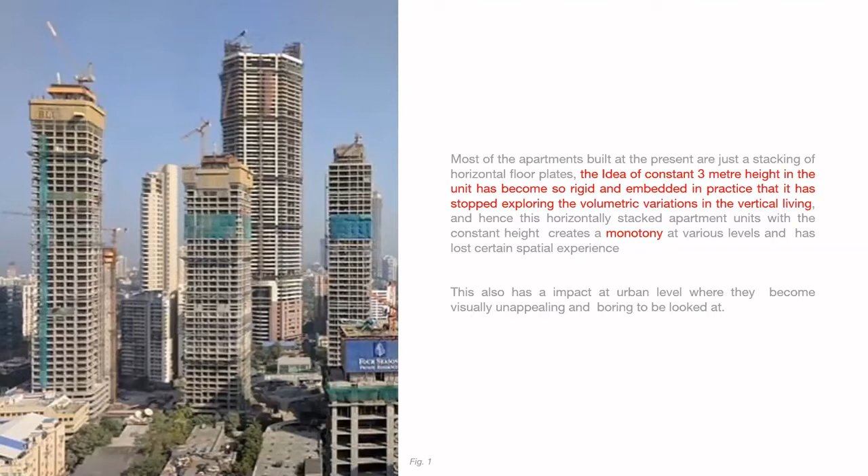As we can see in this picture, most of the apartments built in India at present have a constant 3 meter height, which has become so rigid and embedded in practice that it has stopped exploring volumetric variation in vertical living, which results in monotony at various levels.

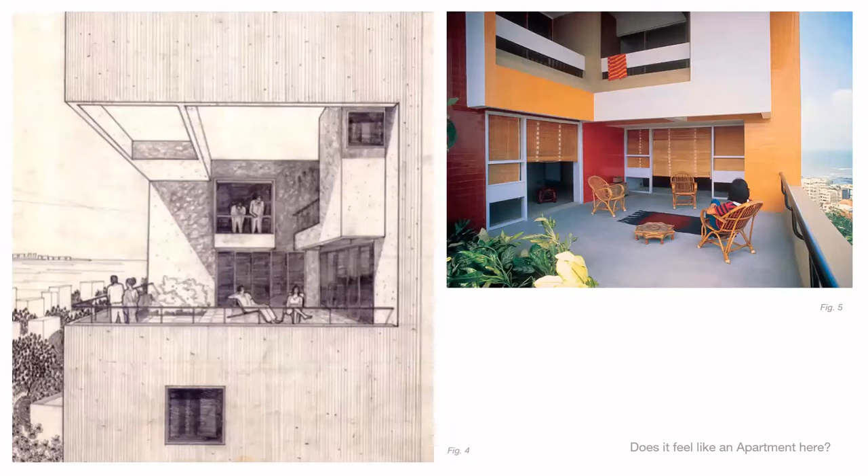Does it feel like an apartment here? Or doesn't this space look like a veranda of a bungalow on the ground? The common thing about all these spaces is that they all belong to an apartment, and yet it still manages to have certain spatial experience that a bungalow gives because of its larger volume.

Now, given that volumetric exploration in apartment units can enhance the spatial experience, the larger question here is how to break away from the trap of 3 meters. Can this situation be changed? Is it possible to spread a unit vertically? Hence this presentation tries to understand the spatial benefits and practical challenges in making such buildings.

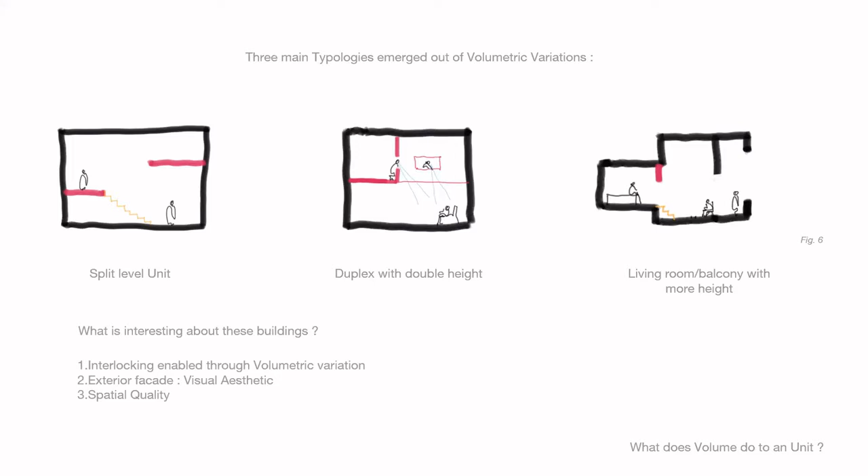These are the major three typologies that emerge out of volumetric variation. We will briefly see what is interesting about this typology through these three examples, three buildings built in different contexts.

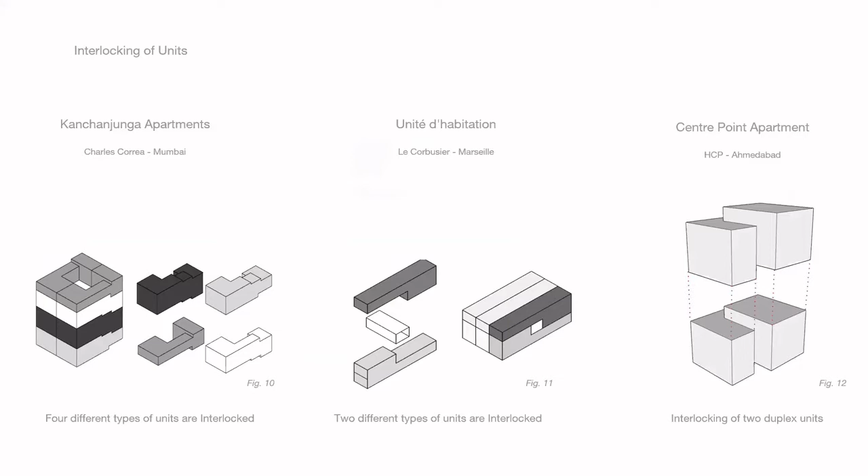The first interesting thing about it is the way the change in volume within the unit allows a variety of units to get interlocked. Or if we see at a block level, how these buildings have achieved certain height efficiency due to interlocking, where each unit tries to remove the impression of standardization.

The second thing is the way such units allow a wide range of openings on the facade that breaks up the building mass and provide greater visual interest.

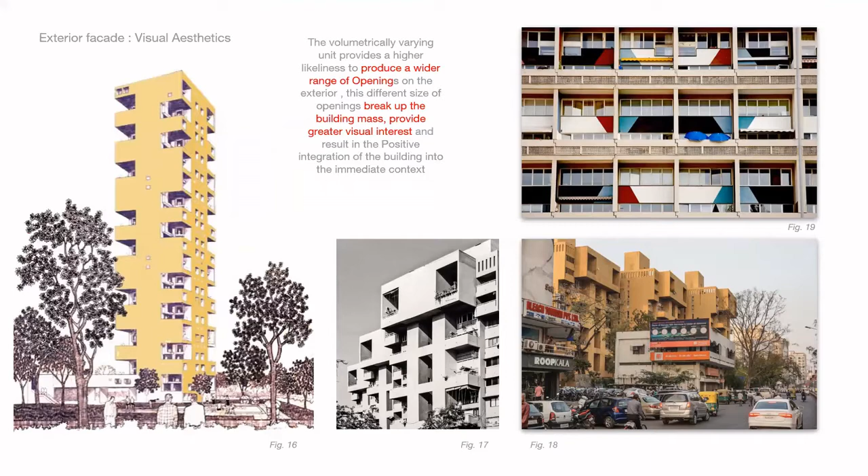The third is the spatial benefit. One of them is privacy, which is the major problem in apartments nowadays. With this typology, where the entire unit is divided on two levels, this problem is solved. I came to know from the developer that they also are trying to resolve the issue of privacy, but it is too difficult when the unit is on the same level.

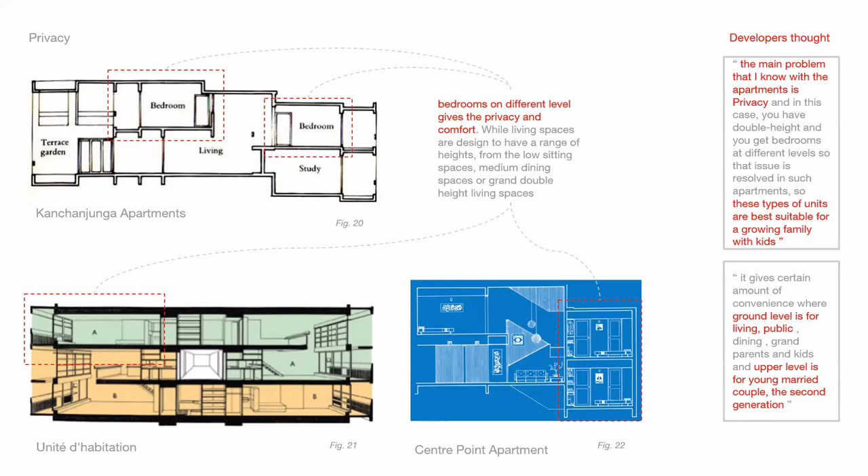The developer thinks that these kinds of units are suitable for a growing family who have kids, or a family with two generations living, where the upper floor can be for a married couple, and the living room and dining space can be more public.

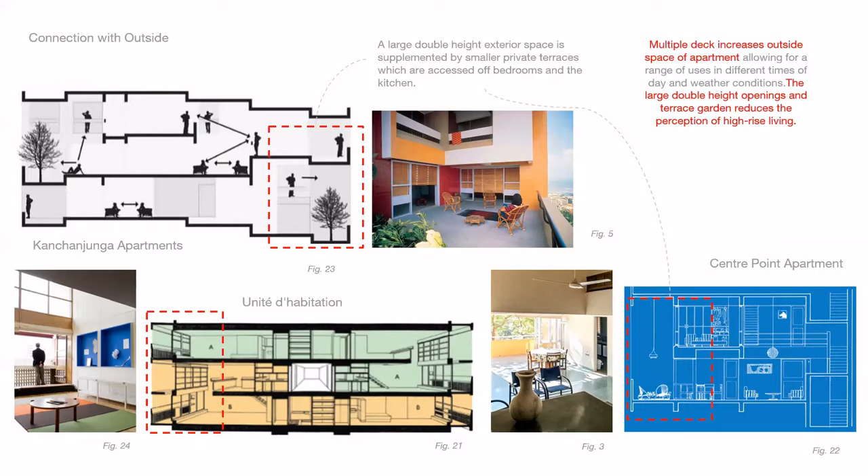The second thing is the way such units allow a wide range of openings on the facade and the way it connects with the outside. These double height openings with the terrace garden reduce the perception of high-rise living.

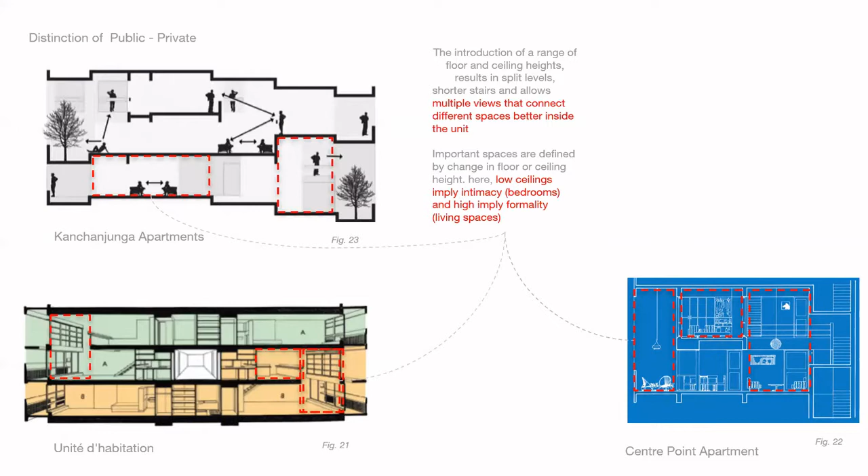And the last is the way spaces are defined with the change in ceiling height: a high ceiling for a public space like the living room, and a low ceiling for an intimate space like the bedroom.

Now, since we know the benefits of it, in the second part I've tried to understand a developer's perspective on why we don't have this type of building block. What are the challenges?

These are the major categories of challenges that emerge through informal talks with developers, the first being psychological challenges: the developer's mindset of repeating success and avoiding risk, keeping as much standardization as possible. They think there is no such demand from people, or that people don't pay premium rates for such things.

Or they think that in an affordable apartment, it is not possible to have a sectional play.

The second is the developers' perspective on buyers' mindset, where they feel that height is not the quality people, by and large, see. People want to see a bigger living room when they enter the house. Or people do feel the spatial benefits of such apartments, but they might not be able to verbalize it, and that stops it from becoming a market trend.

So the question here is, how much, as a designer, can we change this larger perception of the people and convince the developer to take on such projects?

The developer's perspective on a regulatory limitation is that they can't give a double height unit or a different height unit than usual, because then the overall number of units produced will be less. Giving additional height of 1 feet on each level would, for a 10-story building, cost us a loss of an entire floor. But I quite disagree with that, because such complexity can be resolved by interlocking.

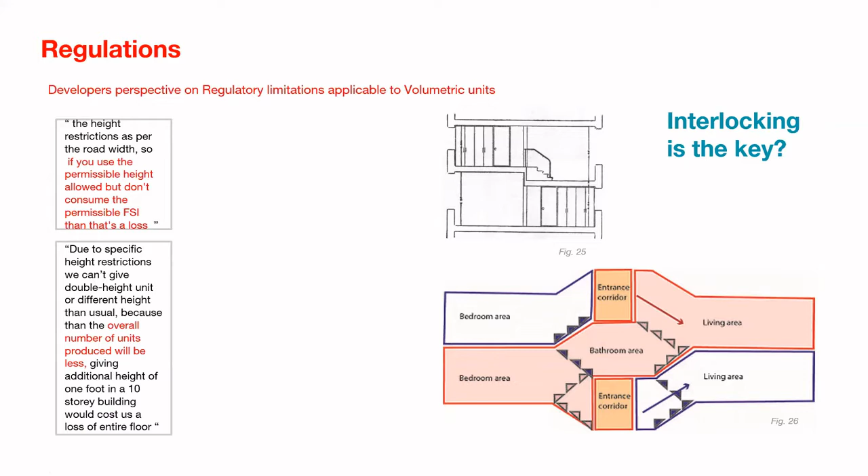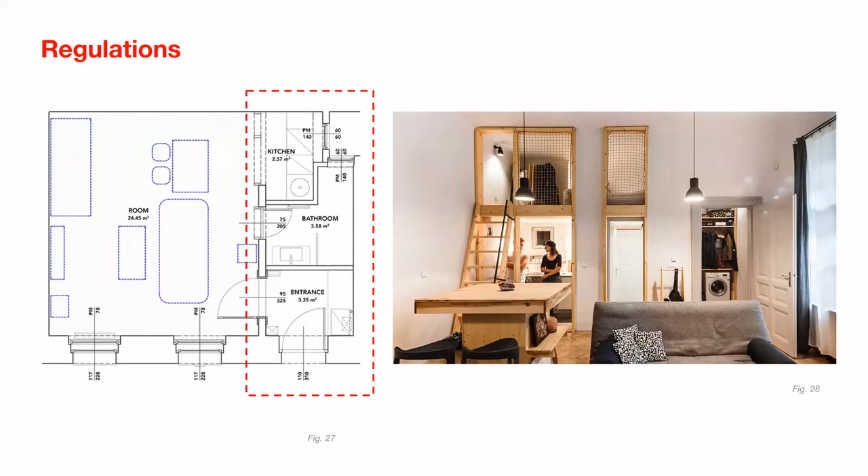This is the in-between solution I was trying to think through. As you can see in this plan, the entire service area is bunched together, where bathroom, kitchen, and entrance are together, needing only 2.1 meter height. By adding an extra 1 meter on top of it, so it becomes 3 to 4 meters, a mezzanine level could be achieved on top of it.

The other regulatory limitation is that the mezzanine can't be more than 30% of the enclosure. Can this 30% at least be 50%, so that 2 rooms of appropriate size can be placed on the mezzanine level? Or can this percentage vary based on the area of the unit, so that the larger the area, the more percentage of mezzanine is allowed?

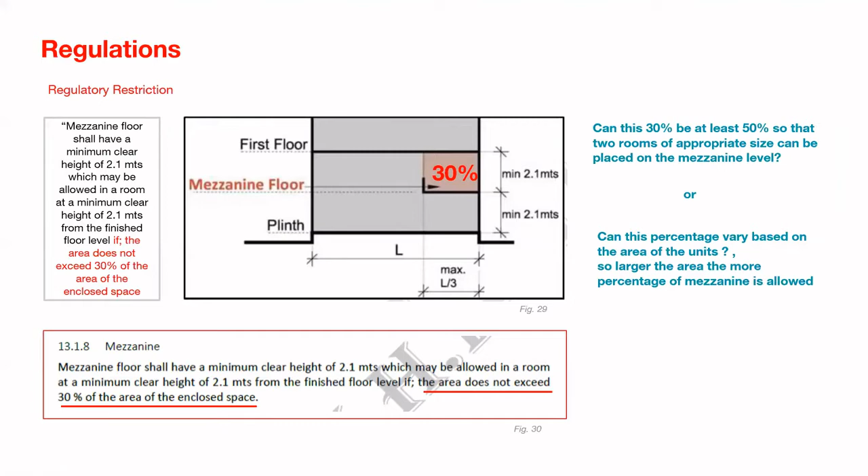The other issue is construction complexity. What developers think about this construction challenge is that the support system has to be changed. A different setup is required for the plaster and paint for double height. And due to the intermediate level, the construction cycle becomes slower if not planned wisely, because after casting split levels, they need to wait.

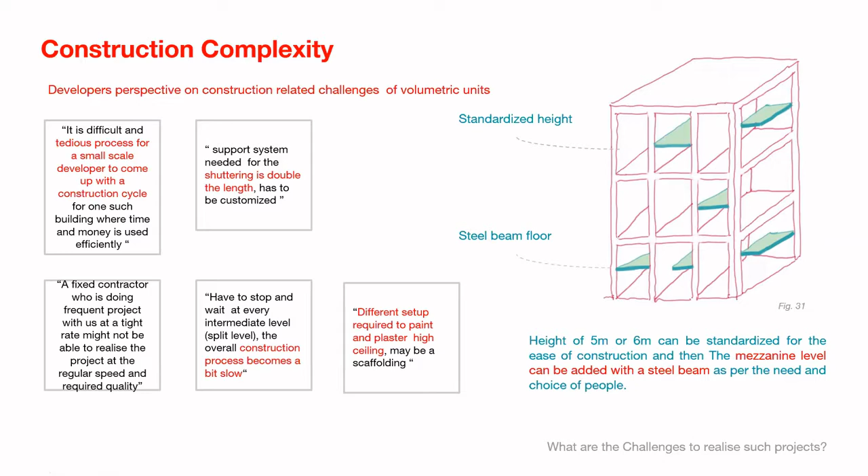So here I was thinking, what if we standardize a 5 meter or 6 meter height, like we have done for 3 meters, and have a building like this, where the intermediate or split level can be made later on? It's initially counted in FSI, but can be added later with a steel beam, or can be part of the interior based on people's choice, who keep adding it afterwards.

The developer's perspective on cost is that since the process is not standardized, the cost increases. And another important thing is that even if the developer has enough FSI or a bigger site where they can do this volumetric play and get enough units, the developer doesn't want to build multiple blocks, because each new block adds its own set of costs.

The major cost here is foundation cost. So maybe we can think of a block layout where the block is longer, like in the Unité d'habitation building by Corbusier, or a different sort of block layout, so we don't have to build multiple buildings but can do these things within a single building. The other cost is the extra staircase within the unit, or the area it occupies, which becomes non-habitable.

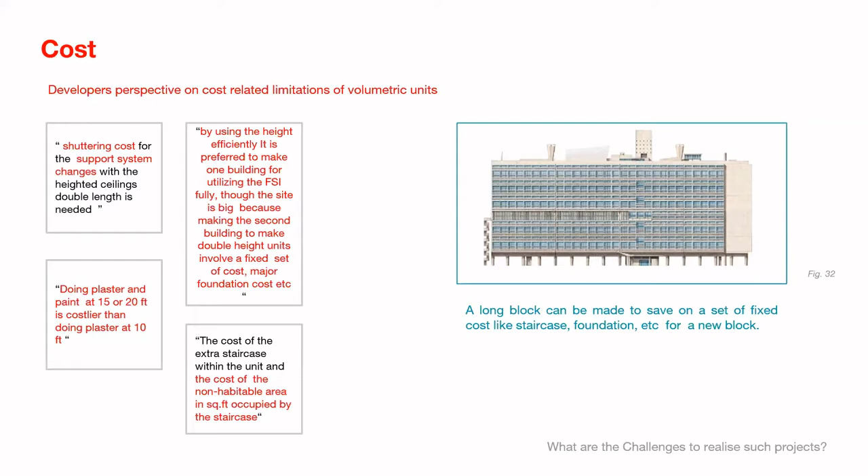There's also the issue of space efficiency, as we talked about with the staircase, and then the unused double height. But we still have solutions of those kinds which are not explored much in India, like a compact lightweight staircase or organized storage space under the staircase. So these issues can be resolved.

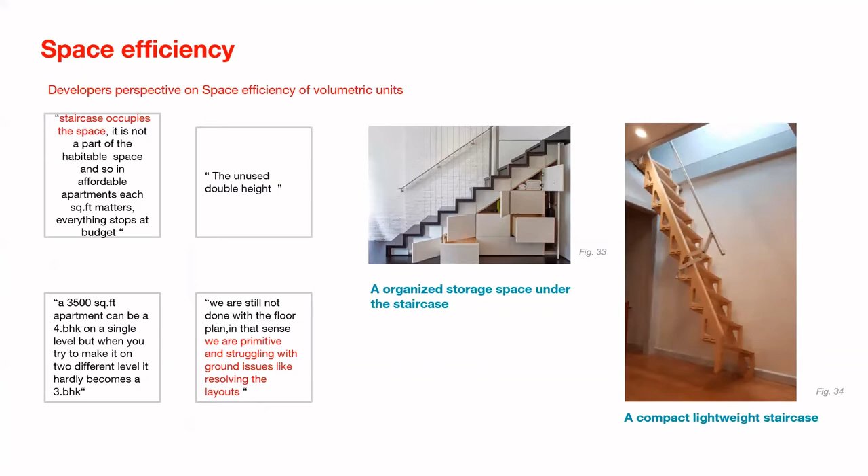And the last point is the entire notion of making height a luxurious thing, where it is only given or explored in apartments that cross a certain budget limit. So what developers have started exploring is that projects that cross a certain height limit, like in the Gujarat context, if the flat crosses 1 crore, they have started exploring certain heights.

One important thing I came to know was that in the 1990s, there was a need for storage above, so there was a lintel, and they had 2.5 feet of storage above lintel in each room. So the heights of the room used to be 10 to 12 feet. But with time, this entire lintel level has been eliminated since buyers are not demanding such things.

Hence, the question is also whether the quality of living is directly proportional to the amount of money spent, or the larger question here is why the increase in height always demands a multiple of 3, either 3 meters or double height. What is the in-between height that is yet to be explored for modern apartments in India? Can it be 4.5 meters? Can it be 4 meters?

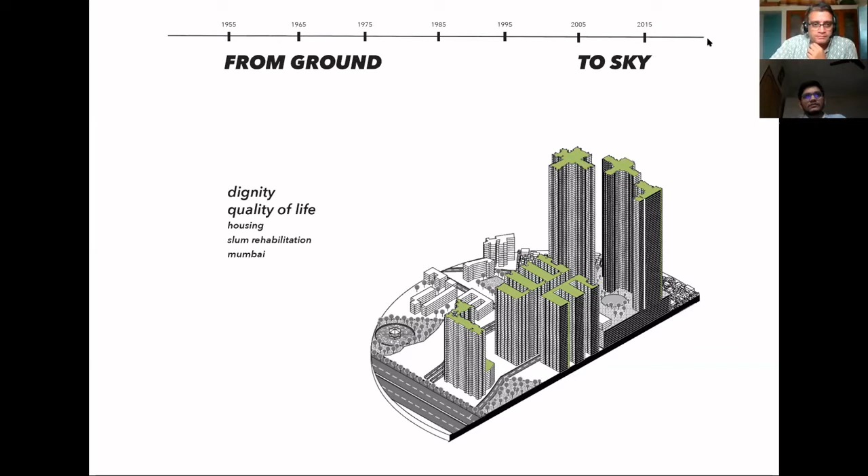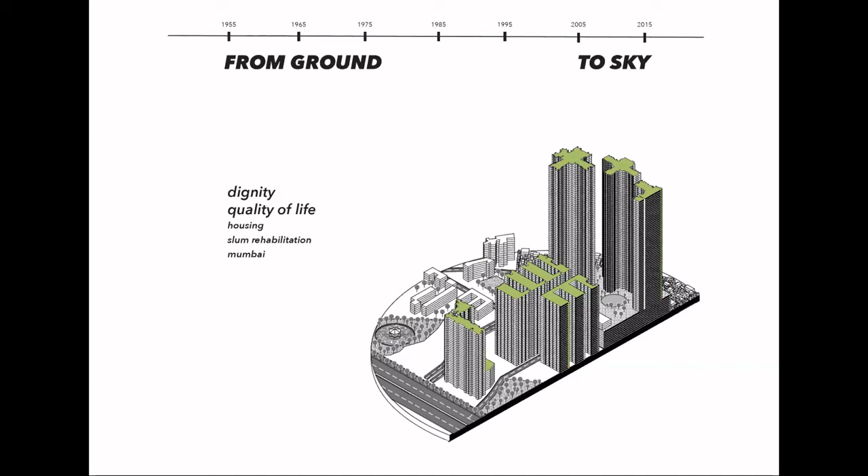So I had initially started out by trying to understand the ideas of dignity and quality of life in the realm of housing, and invariably landed on rehabilitation housing, especially SRA housing in Mumbai. So I'll be tracing the journey of a certain building, the Omkar Alta Monte. This building was interesting to me because it was one of the first projects that looked differently at the process of slum rehabilitation housing when it was proposed.

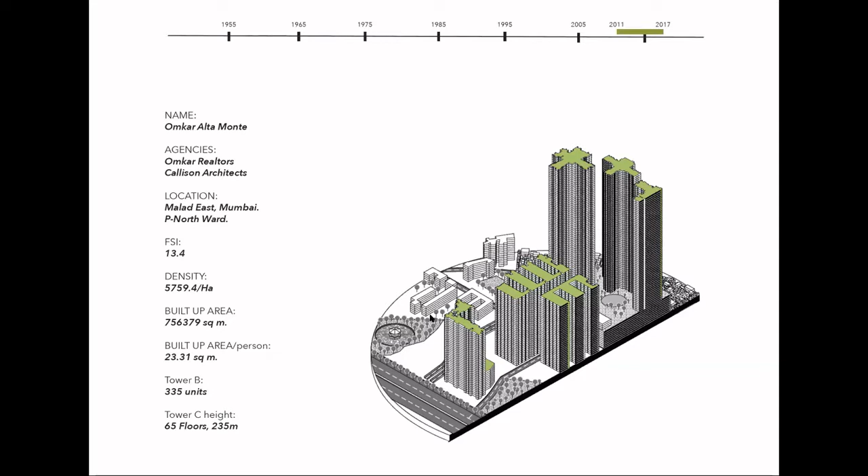Furthermore, it uses the subsidy model and an incredibly huge amount of FSI. There are a number of acts and larger decisions which have led to the eventual built form of our cities, and by extension, this building.

Some of these are the Slum Clearance Act, established in the post-independence period of India, which provides for the improvement and redevelopment of these areas. Then FSI was introduced in Mumbai as a way to control the tenement density.

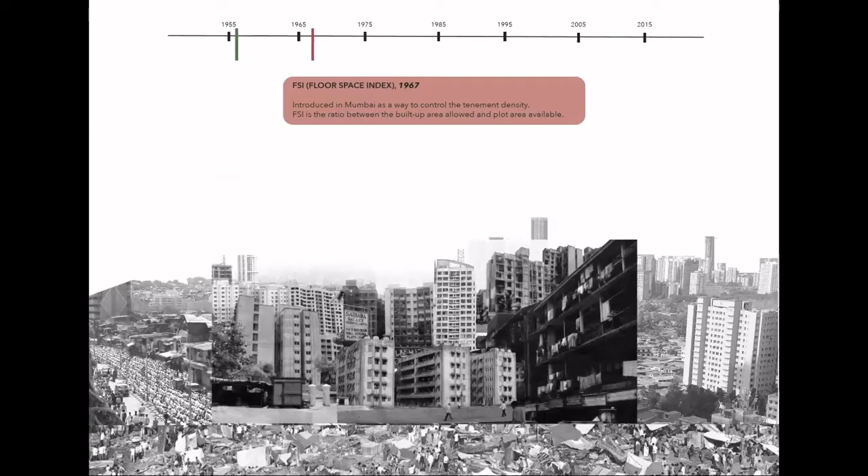In 1994, the development plan for Mumbai was adopted. This included plans for multiple roadways and highways. The SRA was an official agency created to lead slum redevelopment in Mumbai.

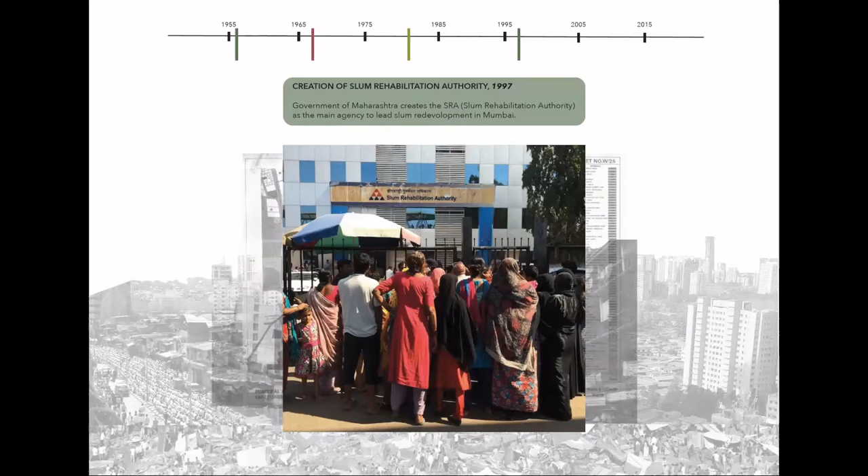Along the way, as governments changed, the cutoff date for rehabilitation of the residents of slums kept changing, adding to how many people needed to be housed. There was also a range of events that shaped this particular project over time.

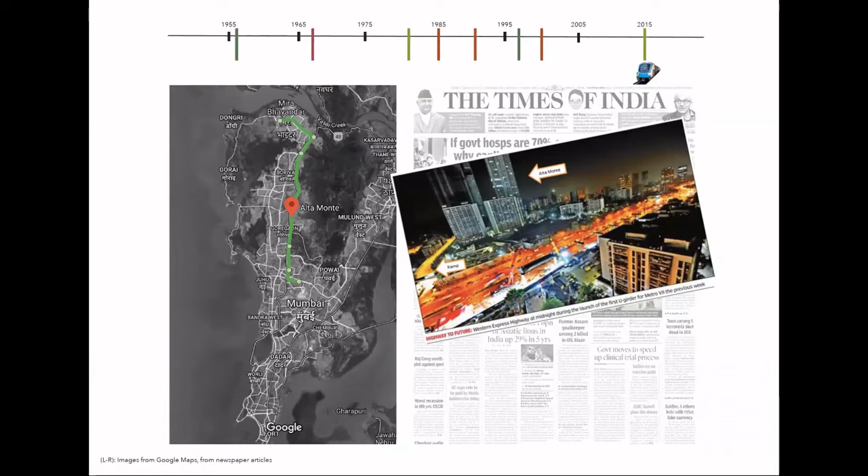With Mumbai's local trains hitting almost a bursting point, the metro seemed like a messiah saving the city. The Metro Line 7 was proposed on the Western Express Highway, extremely close to the site, which drastically increased the value of this project and also the FSI allocated to it.

During the construction phase, there was also a fire that broke out. This fire is notable because it was one of the longest firefighting operations in the city, and this happened because the building was so high and the city's firefighting department still didn't have appropriate equipment to deal with it.

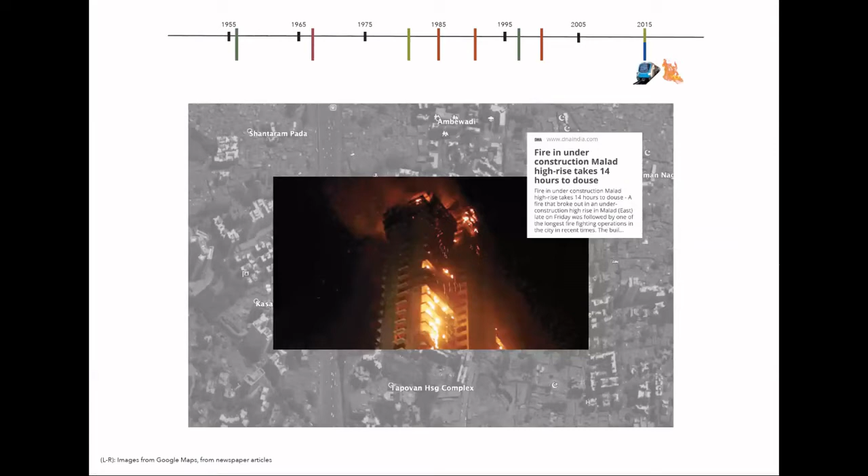Then the BJP and Shiv Sena government, just before the polls, largely increased the number of people needed to be rehabilitated by declaring that everyone living in slums in Mumbai was eligible for rehabilitation.

Another fascinating step in the journey of this building is that the conglomerate Piramal raised a rupees 500 crore apartment fund in 2014 in order to buy apartments from developers at significant discounts to market rates. Its first investment was this project, Alta Monte.

Financially backed, this allowed Omkar to do what few others had done before them, which was promise the residing residents of the slums that their homes would be built before the saleable component. This allowed them to convince the slum dwellers with greater ease and get their permission much faster.

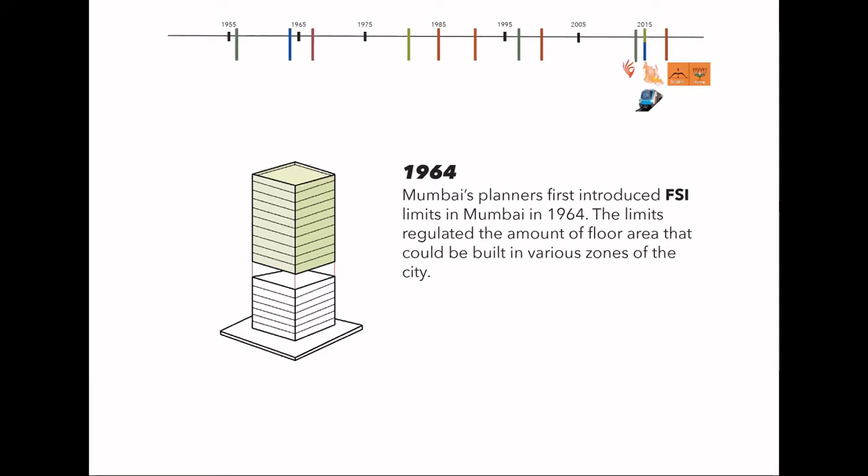With this in place, the construction of the SRA as well as the saleable residential components were built at breakneck speed. Apart from this, there were a number of regulations which allowed this building to reach the massive 13.4 FSI that it has. So within building requirements, there was the addition of the podium, which was made as the number of cars in the city started to increase and the buildings grew taller and wider.

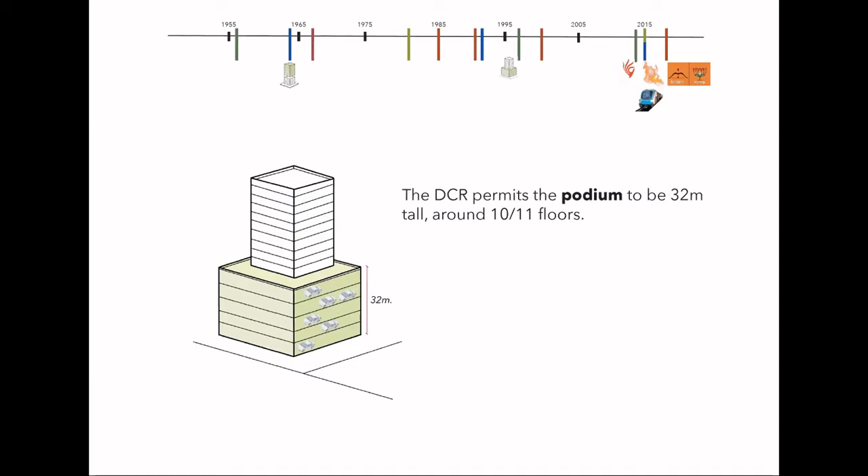Podiums can go up to 32 meters tall, which is around 10 to 11 floors, and have altered the relationship between buildings, roads, and people dramatically.

The first way that a project can gain additional FSI is that if it can accommodate a minimum of 50 cars as public parking. Altamonte, with its 7-story podium for parking, can do that and much more.

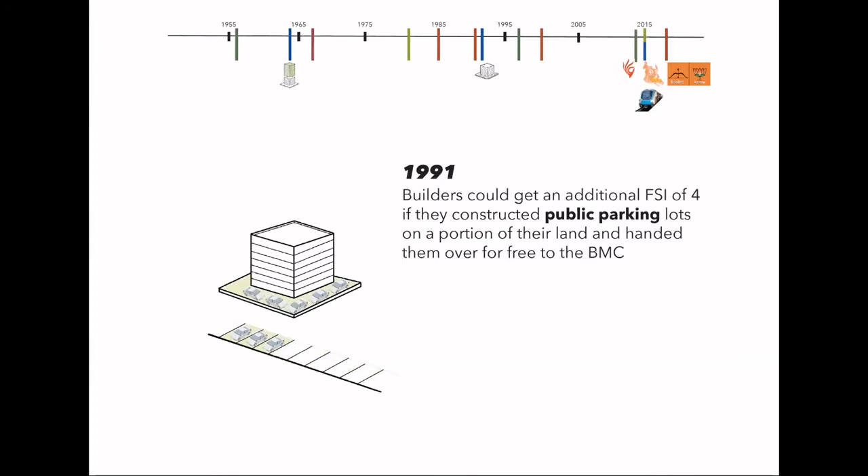The second thing was the TDR, which essentially frees the development potential of the land from the land itself. This usually happens when the use of personal land is reserved for another purpose in the development plan of the city, done so that the government doesn't have to give heavy monetary compensations.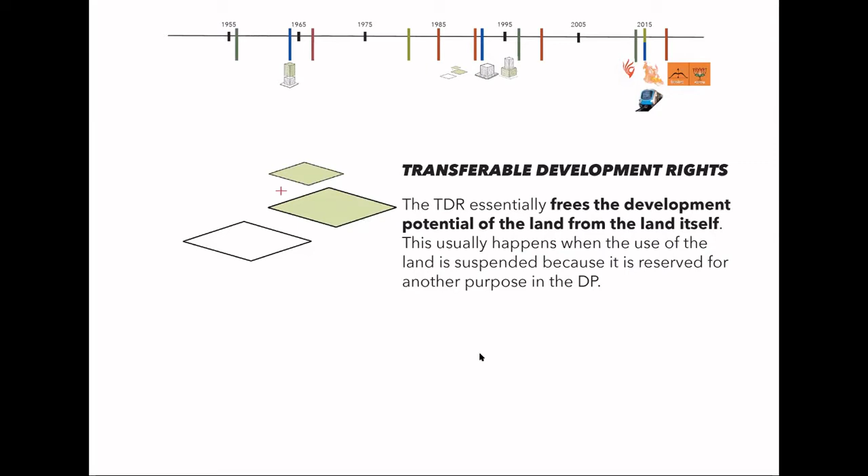The TDR is also given when the owner of a particular parcel of land makes free-of-charge housing for slum rehabilitation, with the idea that this incentive will attract more builders. This regulation plays a large part in the creation of the concrete jungle, so to speak, that we experience in Mumbai, as it capitalizes on the greed of the developer at the expense of those living in the bastis.

Furthermore, there is additional FSI available for the rehabilitation of the people living in the slums. This again makes it very lucrative for the developer to get into these kinds of projects.

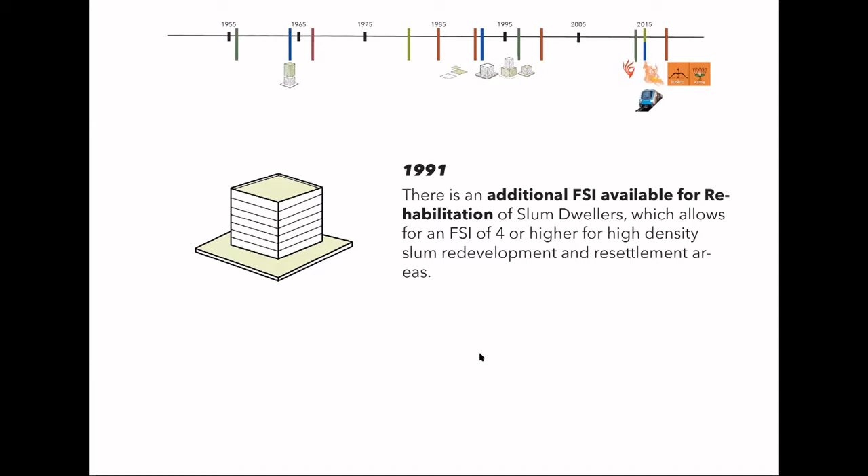Additionally, multiple regulations from the DCR ensure that the inhabitants living in these spaces are at least living in bare, decent minimum spaces. However, these regulations are even further relaxed in slum rehabilitation homes. The maximum density of dwelling units per hectare that the DCR allows is 500, whereas for slum rehabilitation schemes, the minimum required is 500 to 650, and the maximum is not even prescribed. Other regulations which are relaxed include the distance of margins, open spaces, and the distance between two buildings.

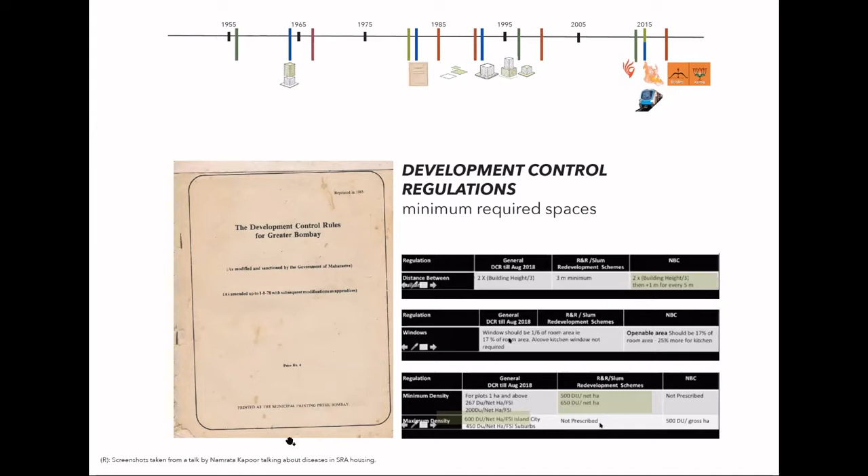For a comparison to the general DCR, this is the regulation. It becomes pertinent to ask, therefore, that if the most basic quality of life for people is generally followed according to the DCR, why is it that because a certain group of people simply have higher densities on a parcel of land, the most basic quality of life for them is also compromised?

Following this line of thought, it is interesting to note that the Omkar realtors seem to be outstanding in their field of expertise. They had entered this market of slum rehabilitation, and soon this became their specialty. They recognized what the main problems in the market were and why most redevelopment projects failed. Primarily because no developer delivered what they had promised, and definitely not within the stipulated time. This was a great cause of concern to the slum residents, who rarely gave permission for the go ahead of projects. This led to a lot of heavy handling and forced evictions, which added to the negative image of the developers.

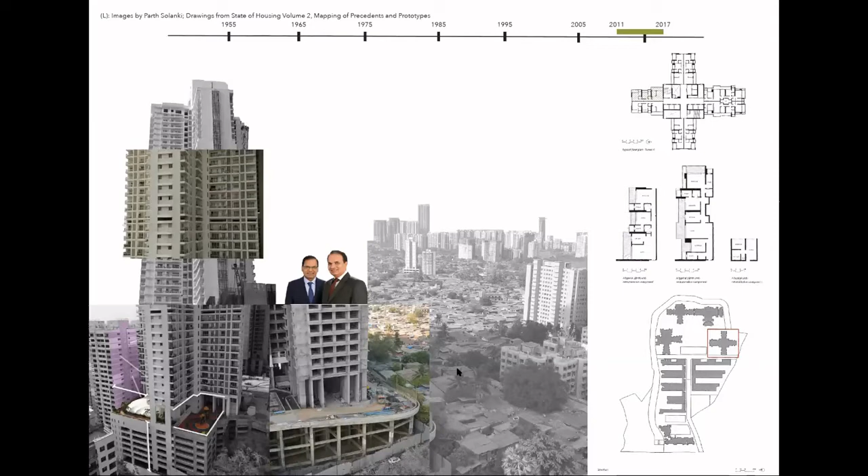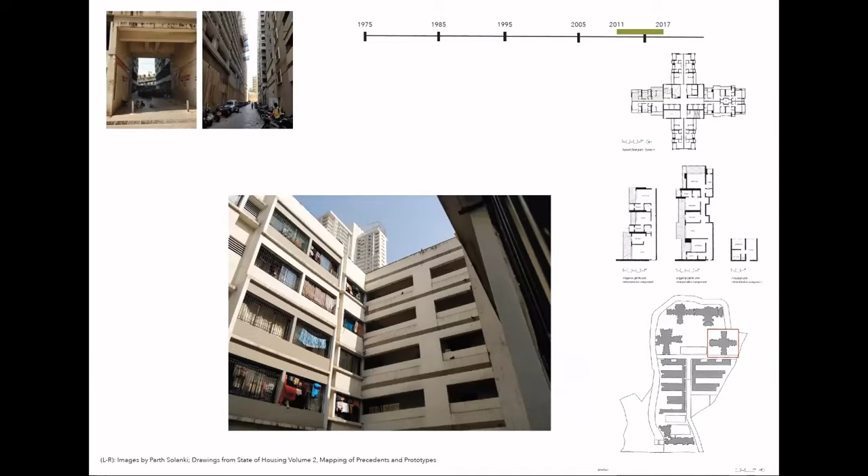What Omkar focused on was creating a credible name for themselves by first and foremost delivering their projects on time and having high standards of quality in their construction, for which they hired the same contractors to do both the SRA component and the saleable component. This attracted a lot of positive attention to them.

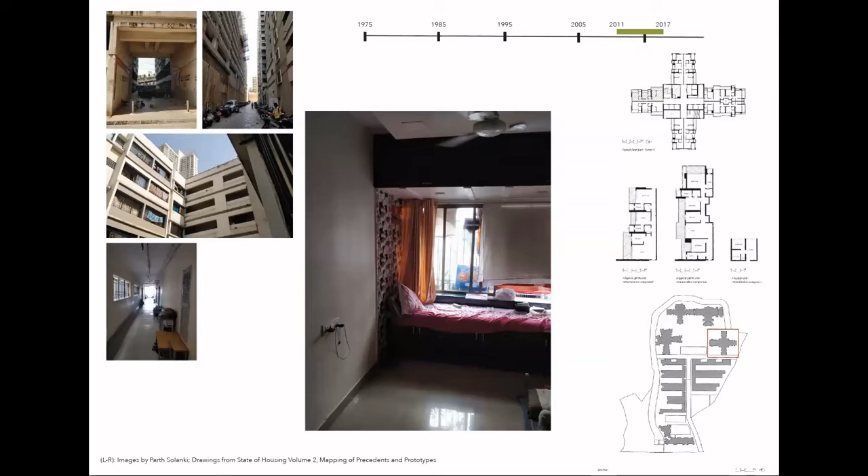And for the people being resettled in SRA housing, this allowed for a certain kind of psychological assurance that their homes will at least be of high quality, and more importantly, maybe equal quality, even if their square footage is much lesser. Omkar asserts that unlike others, no muscle power is used in the procedure, calling it the Gandhian way of doing things. I think we can take this with a little pinch of salt because I read this on a website which was meant for developers.

But they say that they create teams of relationship managers who are trained to approach slum dwellers and convince them about the benefits of redevelopment. One manager reaches out to only 4 or 5 tenements, educating them about the program and even helping out with things like children's admissions or medical aid. The company says that they even go a step further in helping tenants acclimatize to their new lifestyle by giving training programs for elevators, fire systems, saving water, or disposing garbage.

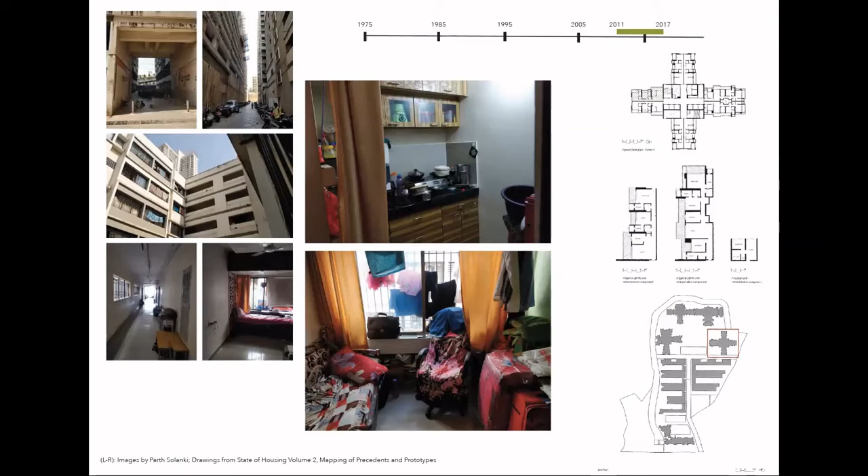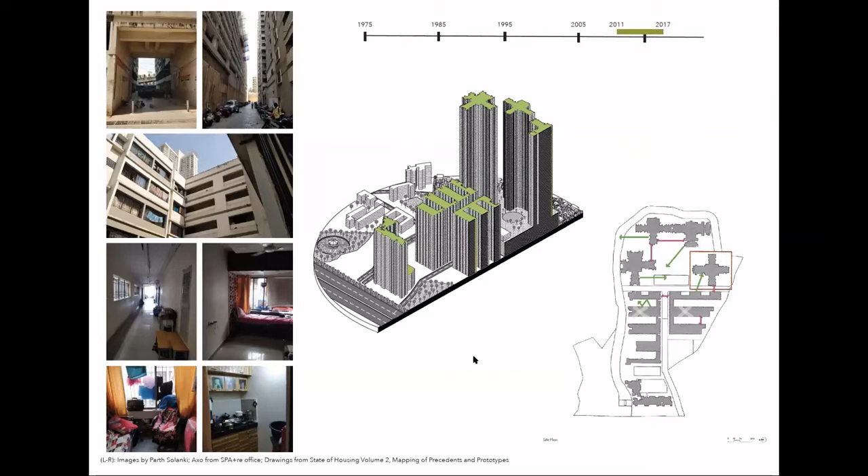In comparison to many SRA projects across Mumbai, this is undoubtedly one of the better ones, with some semblance of light reaching the lower units and basic margins between buildings. These developers already do more than most, yet their efforts fall short in the eventual built projects in terms of the quality of life it affords to its inhabitants and the relationships and hierarchies that it creates. This really makes me wonder, is this the best that we can do?

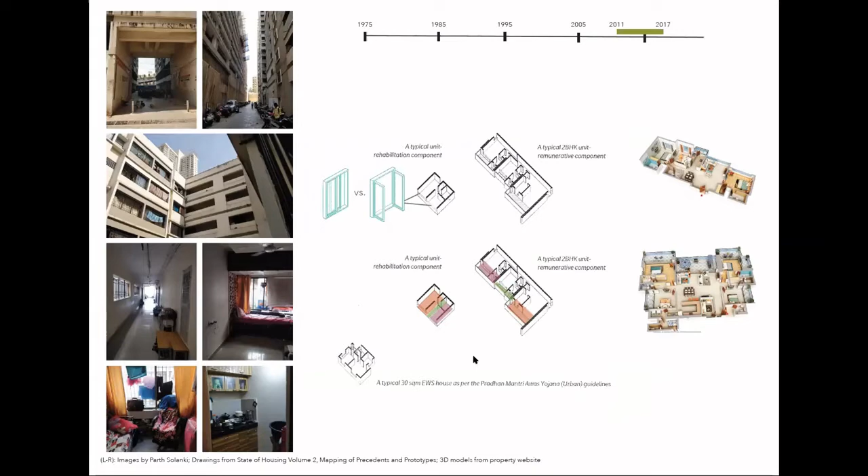The story of this building has sort of ended here for now, but it opens up a realm of so many different stories, questions, and possibilities which are scattered across our cities. And the most important one for me is questions of dignity, of how even with the least amount of resources, developer driven housing models can provide for the same basic quality of life that those with greater resources have access to, and what kind of strategies are there for the architect to intervene in this process.

Apart from actively lobbying to make policy level changes, how is it that we can help create better, more humane conditions for the people living in these buildings within the framework of policies that are in place? Thank you.

Thank you, Ashumi and Ajay. So again, we seem to have shifted gear into looking at housing from a very different perspective. I think one thing that ties both presentations together is that they start actively engaging with the questions of developers and the pressures that developers face, and their viewpoints on housing, and how that inherently skews the kind of quality of spaces that we find in housing.

And at the same time, I think both presentations also touched upon the role of regulations and how it starts skewing the quality of housing that we get. So I think it would be interesting to discuss these two perspectives: the developer perspective, that is profitability, as well as the regulatory perspective.